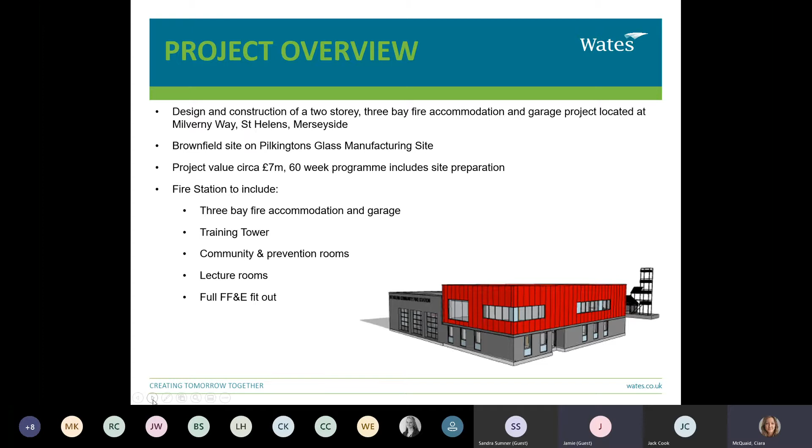Would you like to move on to the next slide, Garrett? So one of the benefits of the project is the improved response times that the fire station will have. The project is a merger of 2 stations - Eccleston and St Helens part is closing and moving into this one station, so this will become a super station in St Helens. It will save the fire service some money year by year on the budget, and it's going to be a fantastic new training facility for the fire brigade. One of the key benefits is there's only so much green space in the country for us to build on, so being a regeneration brownfield project, we're actually taking some of the industrial legacy from previous years and making a fantastic building. We'll touch on that as we go through.

So just to introduce Pete and myself, I'm a project manager for Wates. I've been with Wates for about 7 years. I graduated with a construction management degree, did some A-levels with maths, physics, chemistry. I used to love my sciences, and I really enjoy working outdoors, especially when the weather's been as good as we've had this summer.

Previously with Wates, I've won the Mentor of the Year award from Career Ready in 2018. That was for supporting students from Salford City College. I went down to London to pick up the award, and it was amazing hearing some of the stories of how we changed the lives of young people, and that's one of the key things that Wates do.

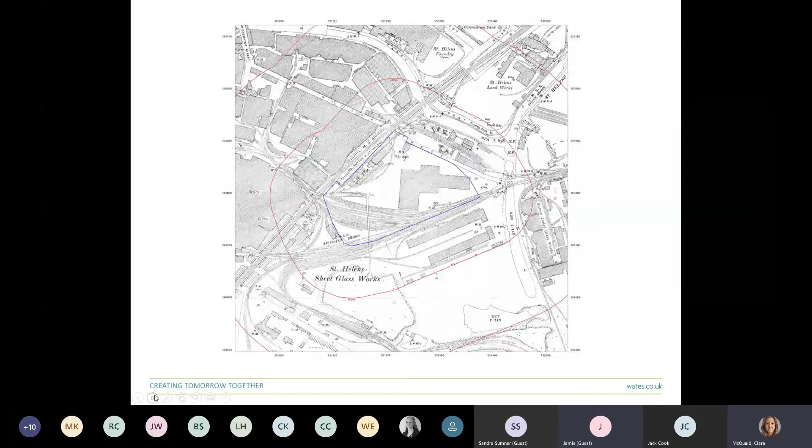When we were working through the project into the basement, and I'll show you some photos later, we were finding some old train lines, and I was wondering where they were all coming from. As you look at the slide, you can see that as the project's been developed over the years with Pilkington's and the other tenants and residents that have been here, they reused some of these train tracks in the actual build.

So as you move on to the 1920s, Pilkington's had bought the land, and in the centre of the screen you can see an L shape - that's a glass making furnace, where they're making things like TV screens and car windows. One of the factories on here at the moment makes about 90% of the UK's production of bathroom glass, and that's still in existence.

If you skip on to the next slide, please, Garrett.

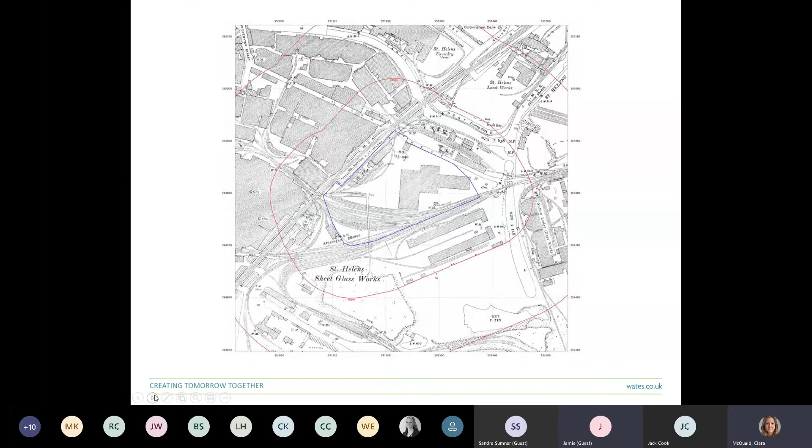The red markings outlining the top of the factory show where they made the glass, and the red line is our site boundary. Before we took over the project, the factory was demolished. Because it was adapted from about the 1920s up until the 1990s, I think they had experimental furnaces on the project. You can imagine that the technology for buildings with asbestos roofs and asbestos coatings onto steel was paramount. Also in the glass making industry, there's contamination as well that they use in the process - so a real mixed bag. I'll show you some demonstration of that as we go through the slides. You'd like to go on to the next slide, Ciara?

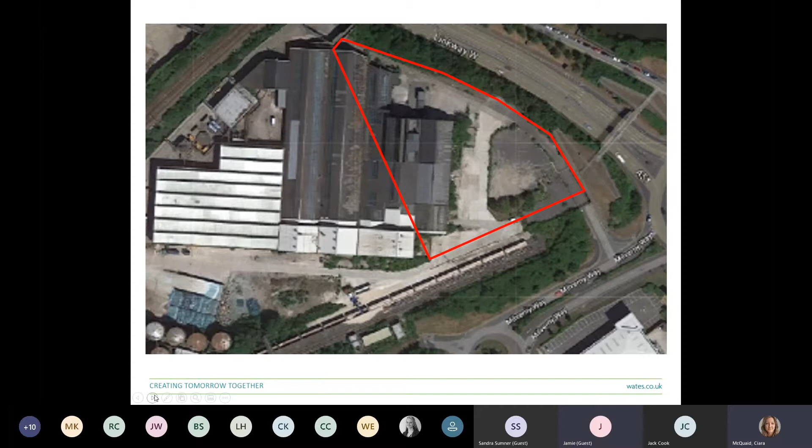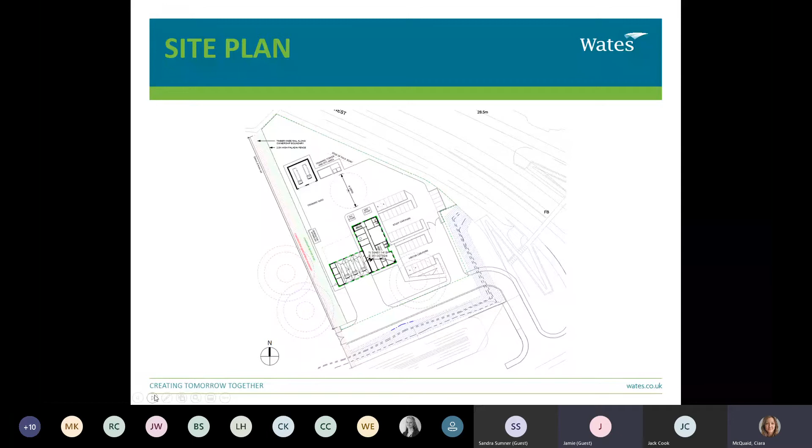So this is the site layout. You can see the main building with the appliance bay with the engine house attached to it, and at the top of the project you can see the garage where the CPL is going to be stored. A couple of things to note on the drawing: the blue hatched line that comes through - there's a couple of high pressure gas mains that run across the entrance to the site. You might also be wondering what the circles are - I'll come to the circles on a later slide. If you'd like to skip forward, Ciara.

Some of the top 5 key risks that we had on the project were the treatment to the existing ground and finding a suitable engineered foundation solution, given potential mine workings under the project and unknown voids based on the furnaces from the glass making process.

So we touched on the mine shafts - the circles on the drawing you saw were potential mine shaft locations reported by the Coal Authority. St. Helens has had years and years of coal workings on the site. Existing services too, like the high pressure gas mains that feed half of St. Helens - understanding a safe method of working around that and bringing in our drainage that crosses these pipes. Also, due to the industrial heritage, there's the existing ground environmental conditions, and how we make sure we don't contaminate St. Helens, our workforce, or anybody in the future occupying the building, coming up with a remediation strategy that satisfies the Contaminated Land Officer and the EA. And finally, ensuring we've got incoming services that will run the building for years to come.

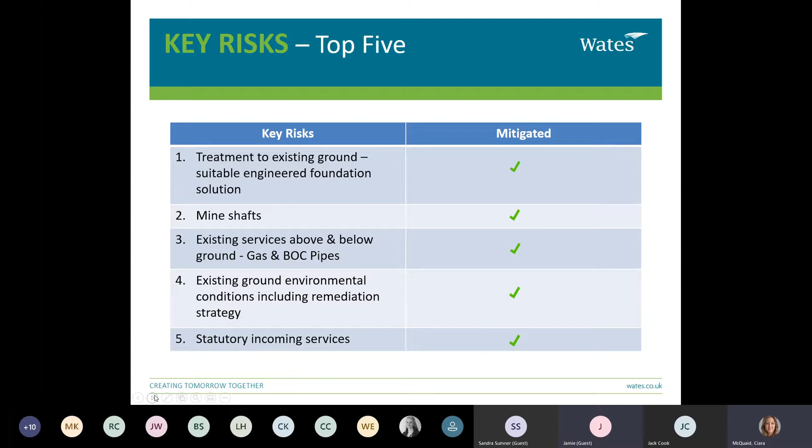So we'd like to skip on to the next slide, Ciara.

The next slide shows the potential targets that the Coal Authority had. Over the years, they've got documents recording where potential mine shafts are - these are coordinates. Before we actually built the building, we had to try and probe and find these mine shafts. Thankfully, we didn't locate any under or around the perimeter of the site, which was good for us in terms of not having to dig down and cap off the mine shafts. But it's quite an involved process, using a rotary drilling rig to put probes in the ground and try to find them. Potentially one of the shafts could have been about 450 meters deep, which gives you a flavour of what we were trying to find on the actual site boundary. If you'd like to skip on, Ciara.

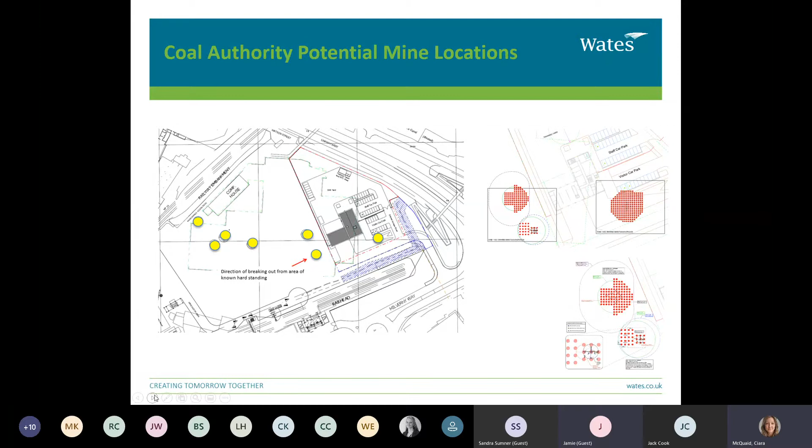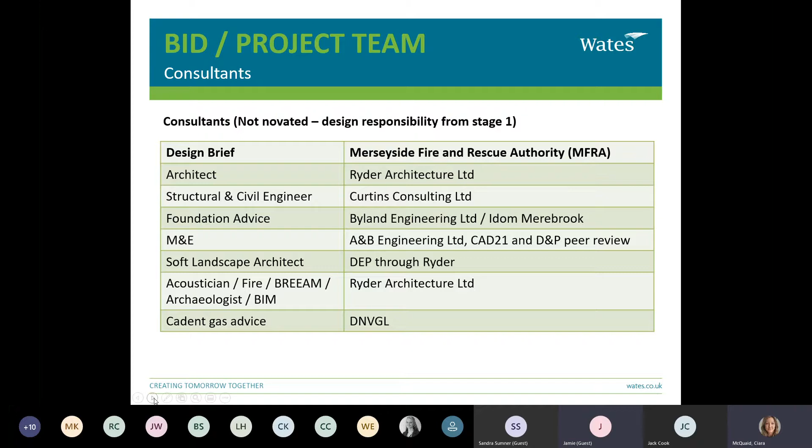M&E was carried out by A&B Engineering, based in Liverpool, which is part of our strategy for the Northwest Construction Hub to use and employ local contractors. The M&E was peer reviewed by Davis and Partners and also CAD 21. The Cadent gas crossing of the high pressure gas main was reviewed by Cadent and a company called DNVGL.

Byland Engineering, a ground engineering technical specialist, looked at the key risks and features of the project. We looked at whether the ground was suitable for piling, and whether it was suitable for mass fill concrete pad foundations, given we had unknown voids and obstacles potentially in the ground.

The best way of approaching the project was to excavate all the unknowns in the ground, all the voids, put the material to one side, crush it, and then create a 4 or 5 meter deep engineered fill foundation, on top of which we could place a raft slab foundation.

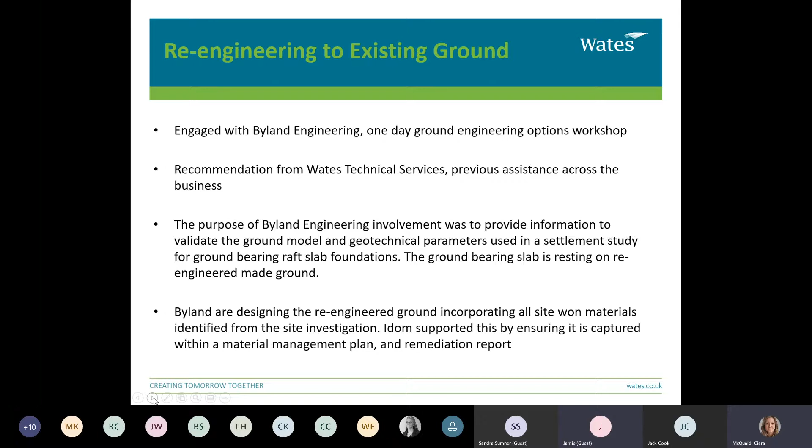We had to work out a safe methodology for machinery to drive around the site without collapsing into any of these voids. We used techniques like buried services survey scanning, GPR, to try to identify voids, core drilling the slabs, and drawing on knowledge from Pilkington's.

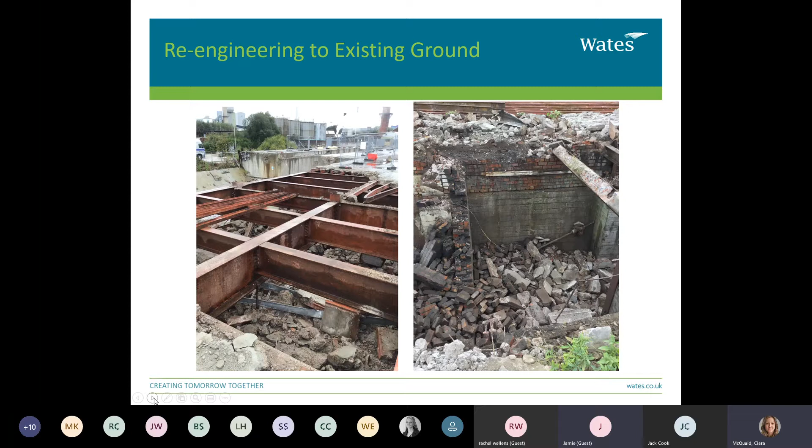You can see the amount of steel on the left, and the brickwork and existing structures in the ground on the right-hand side.

The next slide shows machinery breaking out all the concrete with various attachments - demolition hammers, grabs - each machine had specific jobs that had to be sequenced. You can see the big Moxy on the right, where crushed material was loaded up and driven to the storage area to be crushed.

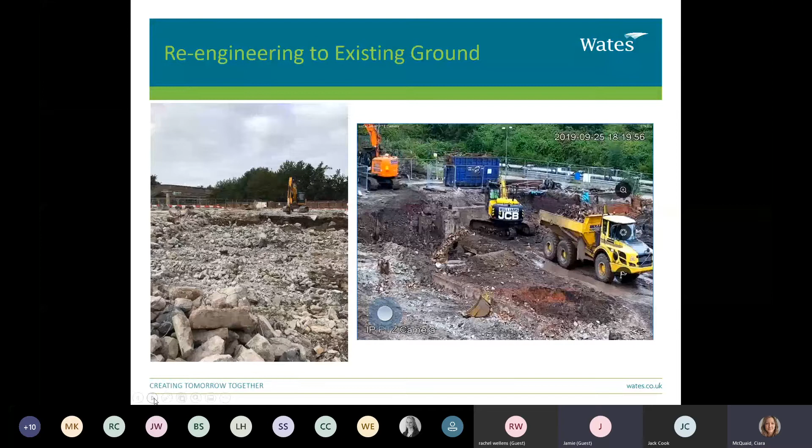The crushed concrete and crushed brick were all tested, and that material was then formed into the basement.

One interesting thing you can see is the black staining on the ground - that's actually flues. Anyone who's been to St. Helens knows they have chimneys, so hot gases from the furnace process went through the flues back up to the chimney. On the right, the yellow arrow points to a honeycomb structure, designed to extract more heat from the flue gases.

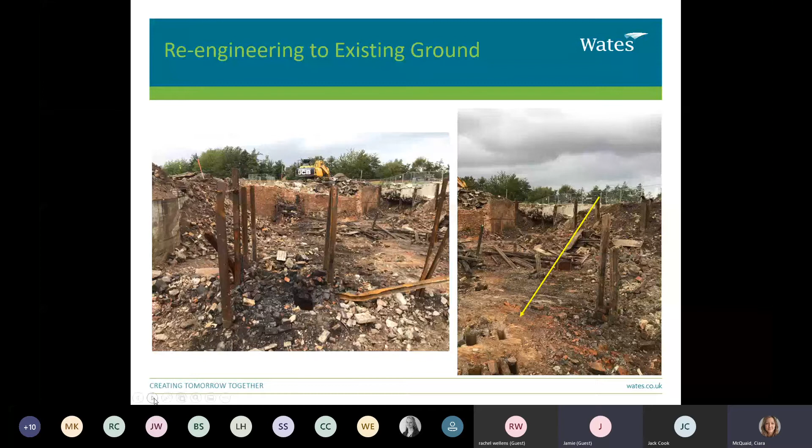The next slide shows a couple more of the flues, and the extent of the basement excavation - we were excavating all the material down to a competent layer.

Once we reached the competent layer, we carried out more testing. You can see the blue brickwork on the left, which someone had to form back in the 1920s or 1930s. When you look at buildings, you think about the people who actually built them - there was a brick making works on the site when Pilkington's was being developed.

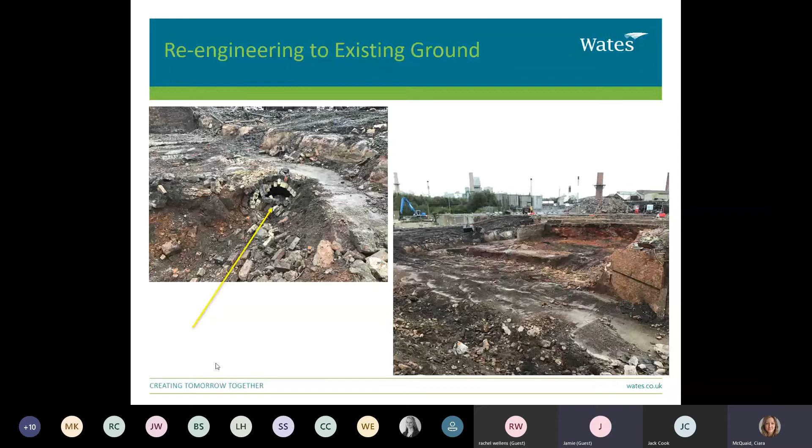You can see the testing going on when we got down to the lower level - dynamic probe super heavy testing, borehole testing, and geophone testing, which meant stopping all plant on site while waves were put through the ground. On the right, you can see us rolling in 200 millimeter layers of tested material.

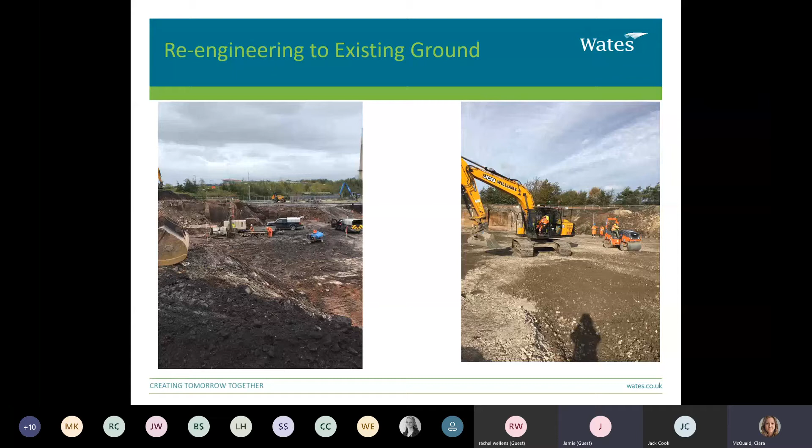So just as a figure for you, on site we've crushed about 14,000 meters cubed of material of various concrete and brick. There was about 200 tons of steel that came out of the basement voids. And that little gadget on the right-hand side is an NDM tester.

That piece of kit is worth about £16,000, and that has to be calibrated. It takes about 3 or 4 weeks to calibrate, based on various tests that we do that drive the spike in the ground, and that tells you whether you've achieved the right compaction and the right moisture content on the layer that you're working on. That all then goes into the validation report for the foundations of the building.

I'd like to go on to the next slide.

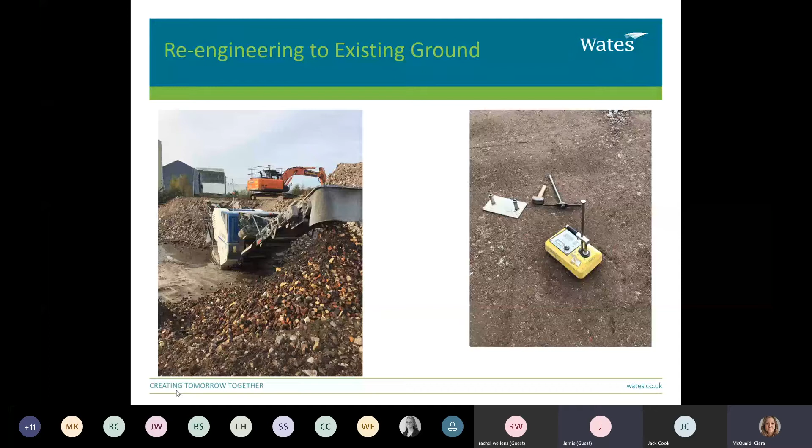So for those of you that are a bit more interested, there is a case study on the Northwest Construction Hub website. You can click on the website, and there's a document there that shows some of the other photos we've got, some of the flues where they were taking the gases to the chimneys.

So that photo on the left, it was fantastic. I think that was a cullet that came off one of the machines. In the glass making process, they used to put 10-15% of waste glass back into the glass. We were finding big lumps of glass boulders on site, loads of things from the heritage of making the project.

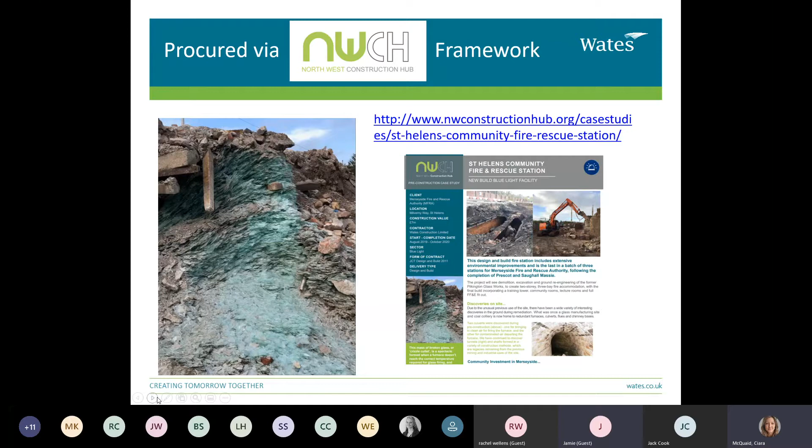And you can see all the old flues on the case study. If you'd like to skip on to the next one.

So for the next slide, one of the benefits of working in construction is we work in all weathers. We worked through the winter, and I think it's been one of the wettest Februaries on record, but the civil engineering team have managed to work in such a sequence that we didn't stop for work. We didn't have any downtime in February at all.

And you can see on the right-hand side that the way the site has been set up, there's space and availability for the machines to work. It's all about keeping people and the machines separated.

The little picture in the bottom there, that was the slab settling analysis that we got from Byland Engineering. So for those of you looking at different careers in the industry, it's not just about driving machines or bricklayers, which are important to us. There's also a lot of work that goes on from various consultants, designers, and engineers.

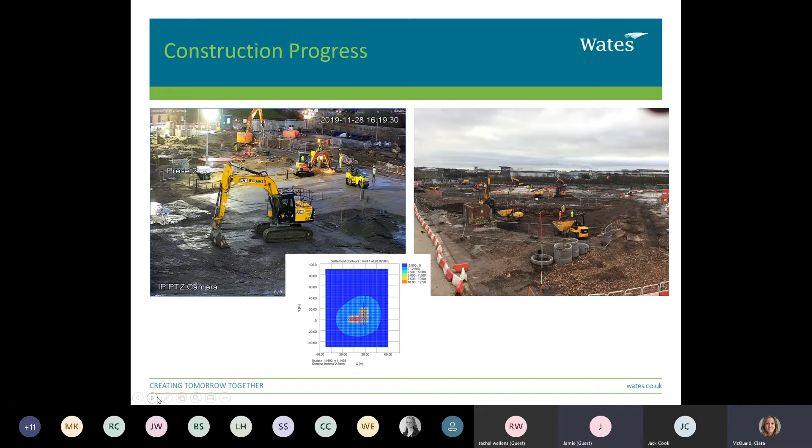So if you'd like to go to the next slide.

So you can see the second best building in St Helens in the distance. Obviously, ours is the best. St Helens are the champions at the moment for the Super League. But you can see the development in the area.

So on the right-hand side, where the retail part was an old colliery. Our building was based on a colliery, and then you can see the development, how things have changed. And there's future development in St Helens on the top right of the photo.

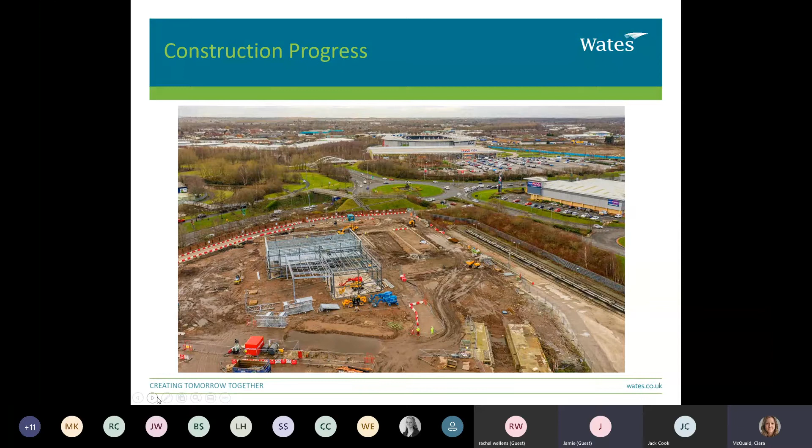Okay, if you'd like to go to the next slide.

I spoke briefly about the Cadent gas main, and again, you can read through the slides later on if these are saved onto the system. Within Cadent, if you skip to the next slide.

And on the right-hand side, we engaged with Cadent. We had the vacuum excavation unit, so anything working around services, just to make sure we don't damage the service with the bucket of a machine, using the Hoover attachment is a way of not damaging the pipeline.

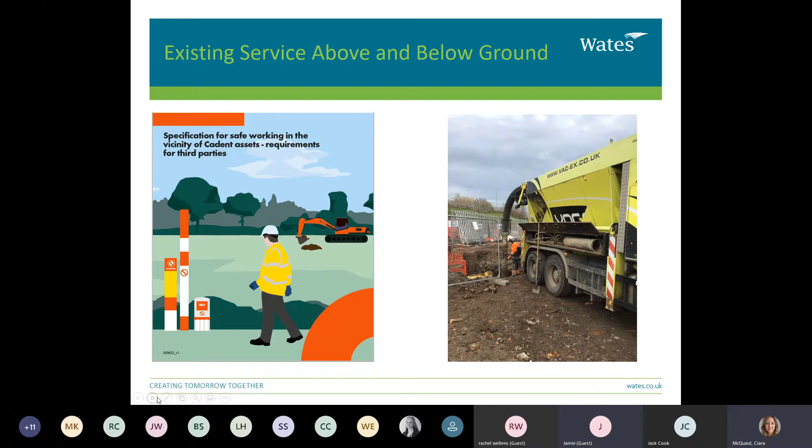So we'd like to go to the next slide.

Again, we touched on environmental control. Being a brownfield site, we had an asbestos management plan in place, with daily and full-time air monitoring. We had guys trained up on site in asbestos works, a full-time analyst checking anything discovered, and an asbestos contractor on site picking through materials to make sure we were capturing and monitoring any contamination possible within the site. All of that was supplemented by a material management plan and remediation strategy, and we had the St Helens Contaminated Land officers visit site to make sure everything we were doing was best practice and in accordance with national regulations.

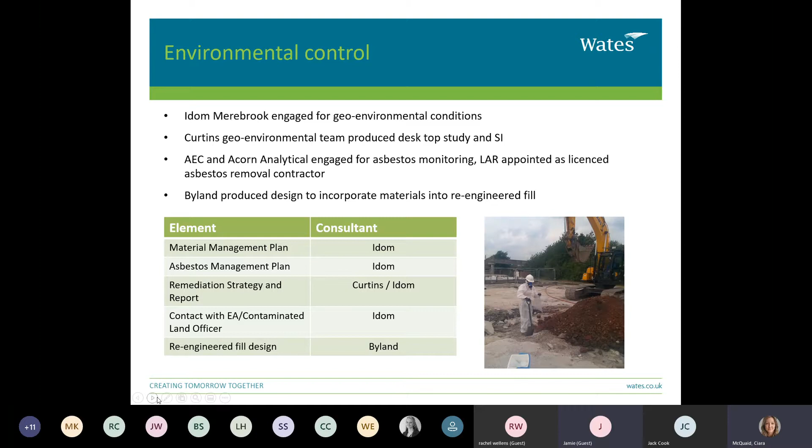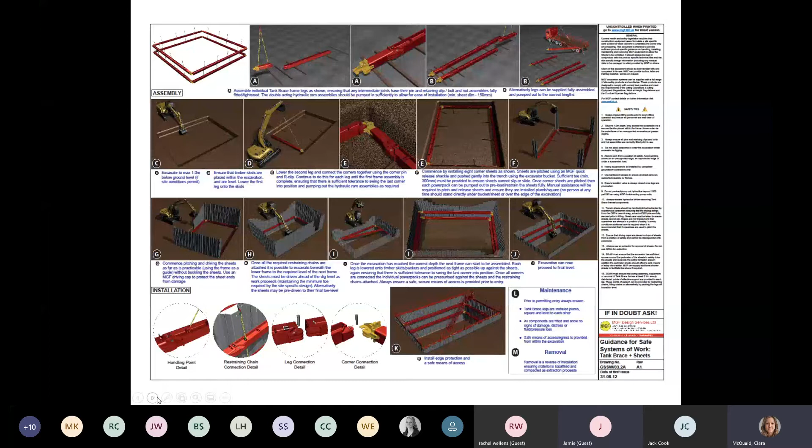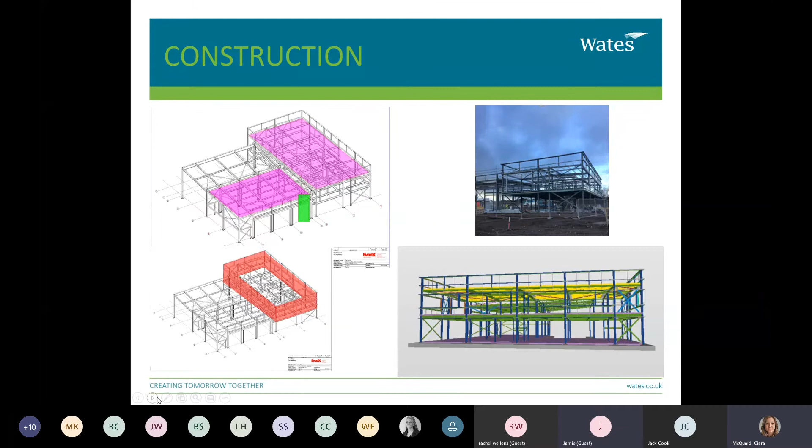Now we can look at the actual construction process. In the next photo you can see the plastic holding down bolts, where we've laid the concrete slab and the foundations of the building. For the holding down bolts, we're using plastic cones to protect the concrete going into the bolt. You can see where the steel frame goes and the reinforcement on the slab - it's about 750 mil thick reinforced slab on top of all the re-engineered fill in the ground.

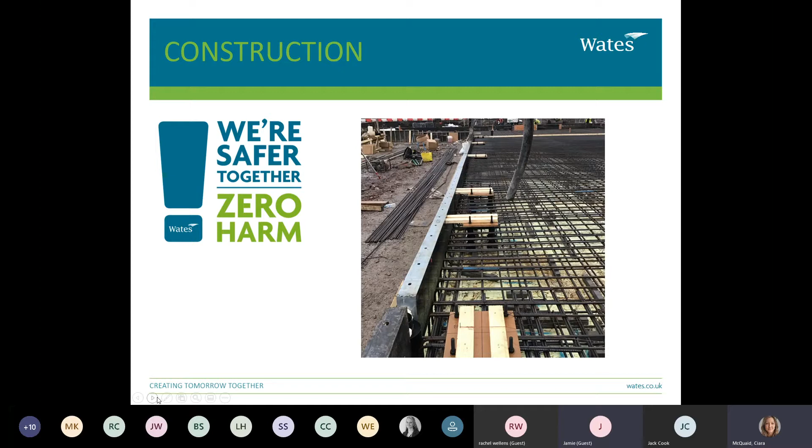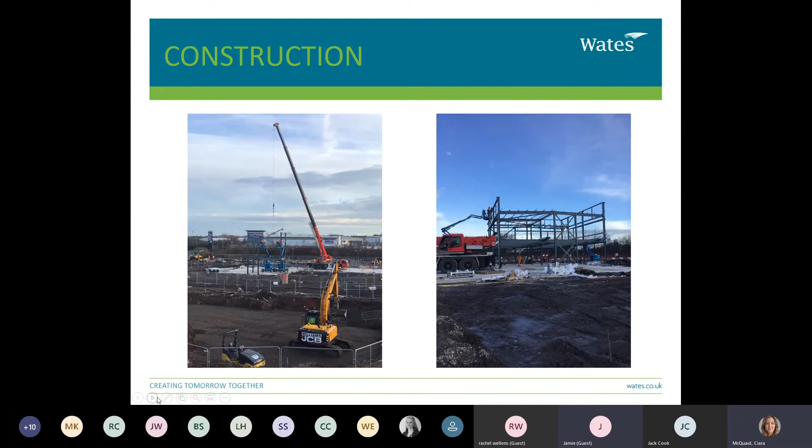If you move on to the next slide - a couple of photos just to show the process. We've got a 60-ton crane, shown on the left-hand side, which is what we erected the steel work with. You can see the steel frame going up, which is the basis for the structure of the building.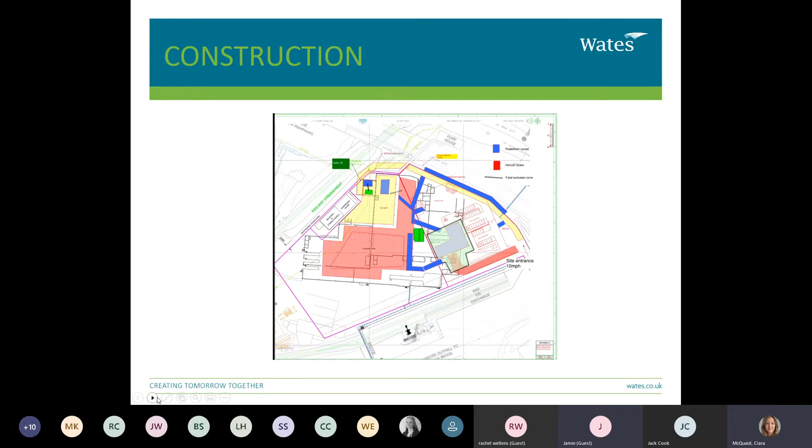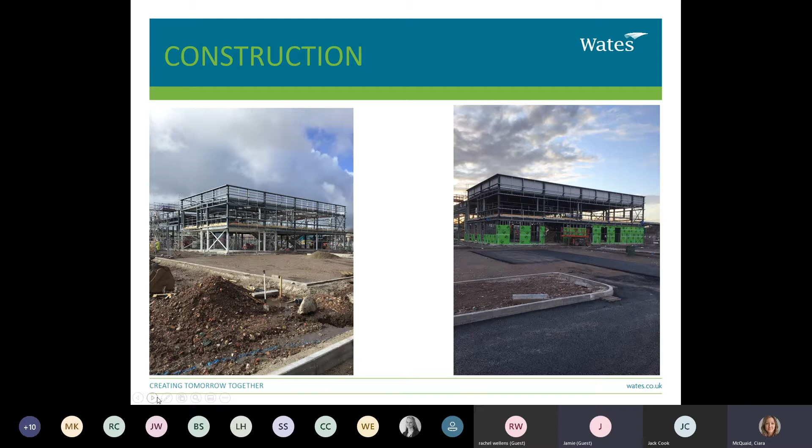Moving to the next slide, the next couple of photos show the envelope of the building. You can see the insulation on the right-hand side, and you've got your secondary steel support. We'll touch more on the facade in a couple of the slides coming up.

I think we'll skip over the video just now, but there is a video tour of site so you can have a look at the finishes. We talked about a couple of things inside and external. I think we're going to upload the PowerPoint anyway, so you can look at that yourself. I'm going to touch on a few more things rather than do it just now.

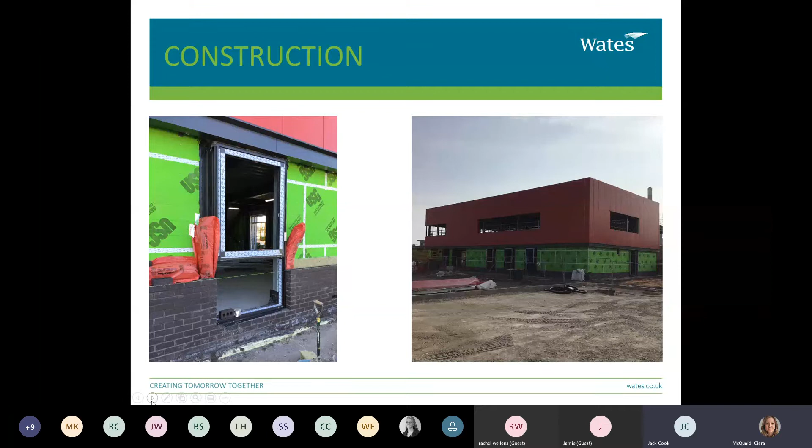Yeah Jack, we're just mindful of time. I know where we are, so we'll skip on to a few more photos. I'm just saying, obviously with time, Matt, do you want to just play the video and then we might move on - show something different? So if you just show the video for the last 5 minutes and then we can share the PowerPoint with everyone, if that's all right with you. Just to do with time. Yeah, sure, okay, yeah fine. You want to go back a slide and then you'll be able to show the video.

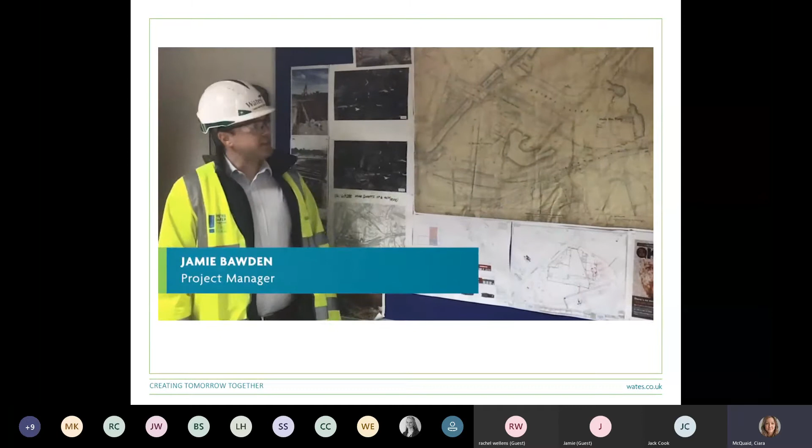I'm Jamie, the project manager for the St. Helens Fire Station project. Back in the 1880s, the site was built on a colliery.

It was an old coal mine, and then from 1920 onwards there was an industrial factory on site making glass. We took over the project when the factory was knocked down, and we've broken up all the concrete on site, crushed it up and used it in the foundations of the new building. This has reduced the number of vehicles on the road, meaning a more sustainable building and reduced diesel burnt and pollution. So it's a clever way of using the historical past to make a brighter future for all of us.

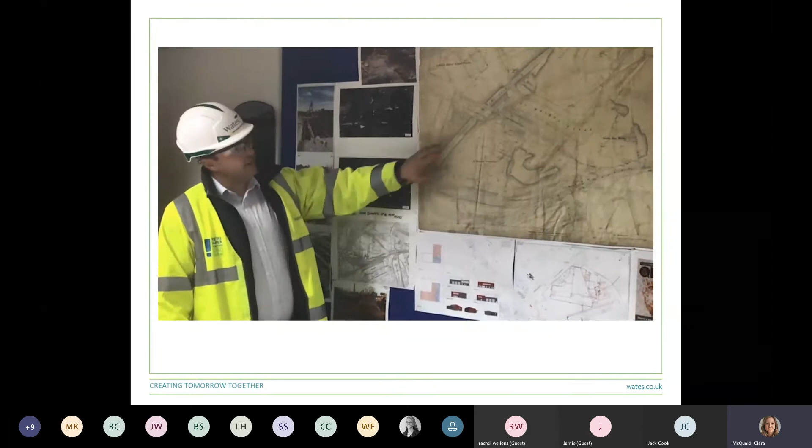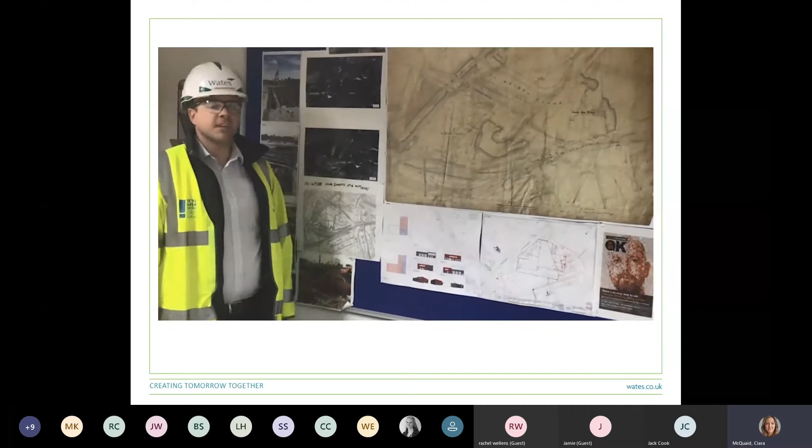The old map we got from F. Parkinson's, our nearest neighbour, clearly shows all the industrial heritage from St. Helens. You'll notice there's lots of chimneys poking out of the skyline. We've worked our way through all the ground, all the bases and footings of the chimneys, the flues and the glass that was in the ground, and delivered a fantastic new fire station for emergency fire and rescue.

Good morning, welcome to St. Helens Fire Station. How can I help you today? Have you been here before? Due to COVID-19, we have a procedure in place where once you're on site, we'd like you to wash your hands. If you give me a moment, I'll find out if you're supposed to be here, and I'll radio the team. Perfect, thank you very much.

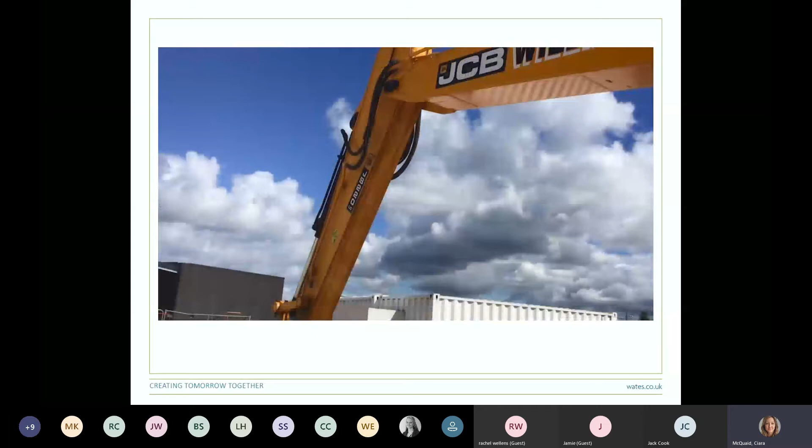This is a 20-ton JCB excavator, the biggest machine we've got on site at the moment. This was a brownfield site originally, and you've got huge excavations. The power the hydraulics on this thing produce is immense.

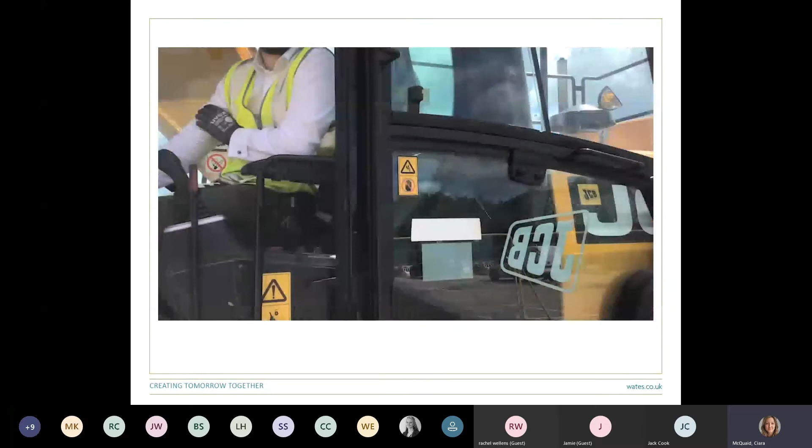The reason we focus a lot on building walkways is that when you've got machines like this travelling around the site, there's potential for some high-risk incidents, so you've got to be careful when you're moving around. One of the things we like in construction is that we can use big toys like this. We always like using bigger and bigger machines, going all the way up to the likes of this 20-ton excavator.

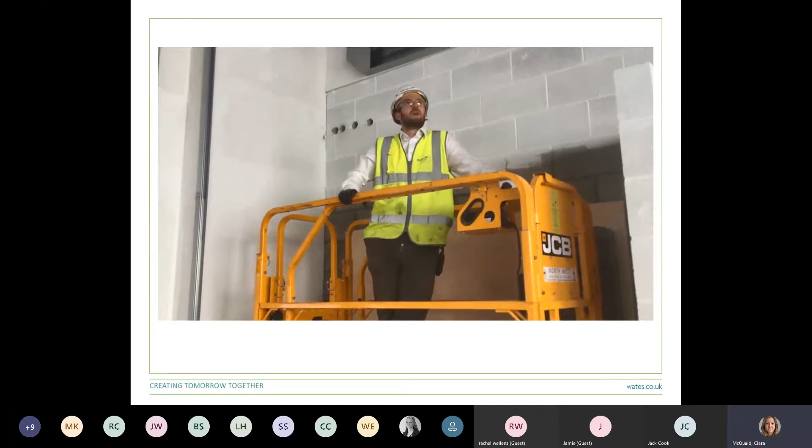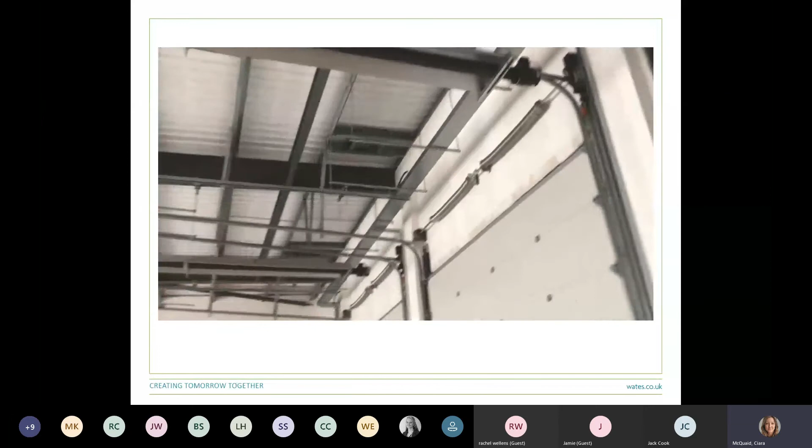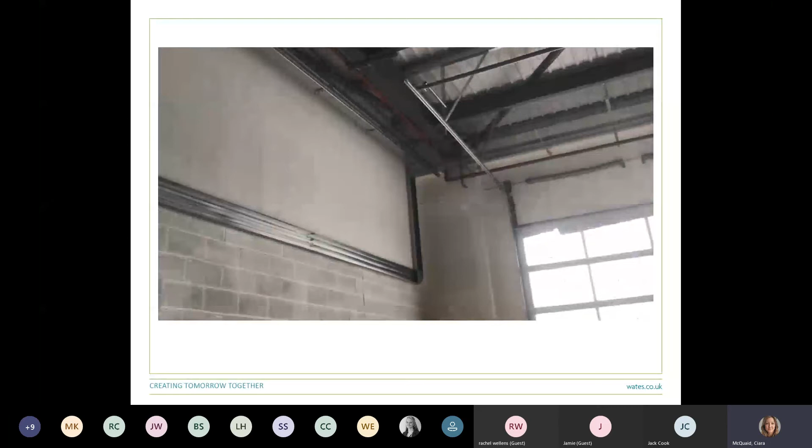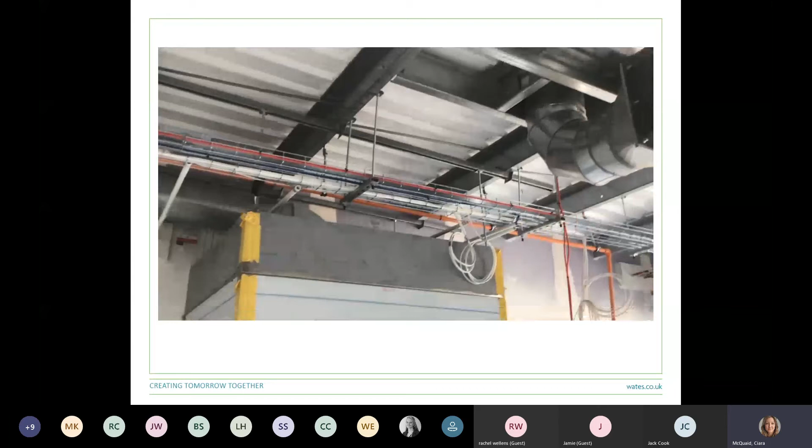So we're now standing where the kitchen is going to be fitted eventually. If we look up, you can see the importance of having secure fixings - it works both ways. Down from the roof, you can see the screws coming through, holding down the roof out and the insulation. And the other way, with the force of gravity potentially bringing things down, you've got secure fixings to the purlin, which is the light metal running across. The whole unit's fixed back, so it's nice and secure.

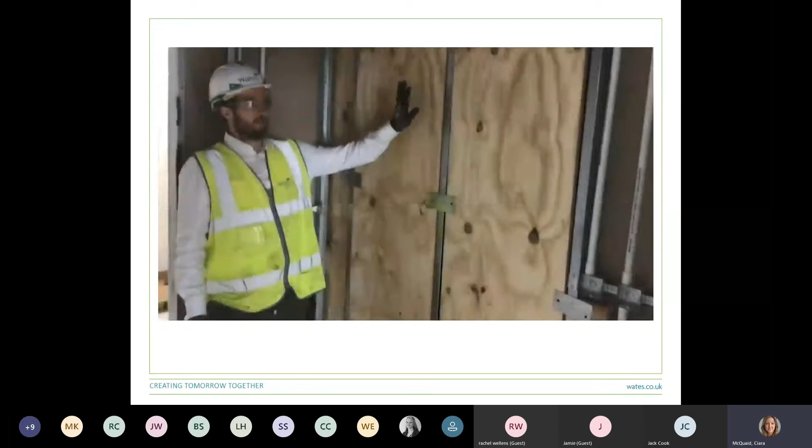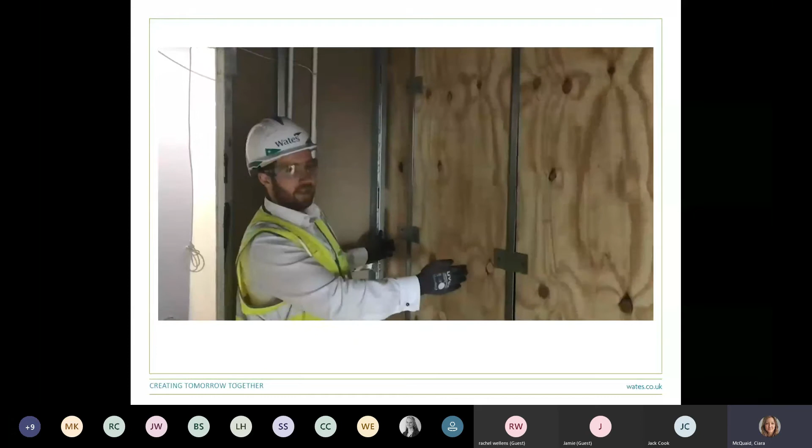One thing for me in construction that you don't always get to see when you go inside a finished building is what's behind walls and ceilings. If we look at all our internal walls, you can see you've got your plywood running down the wall, called a pattress. We use that to fix something back, so you've got a more secure fixing in case something's got some weight to it - so lights on this one, and we've got a sink unit going in here, which will be supported by the pattress behind.

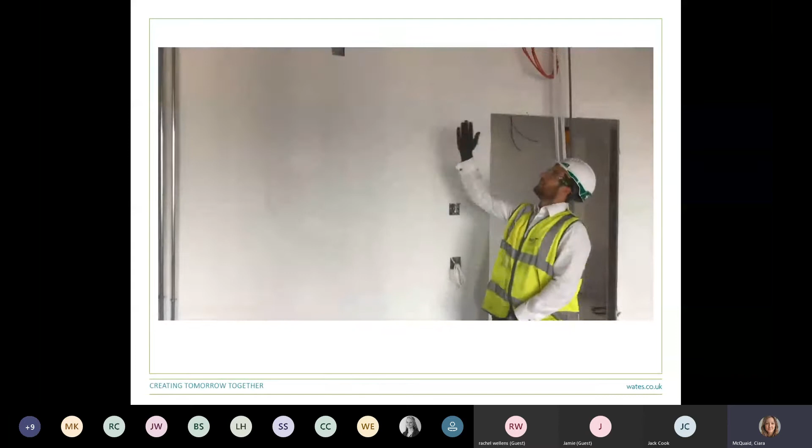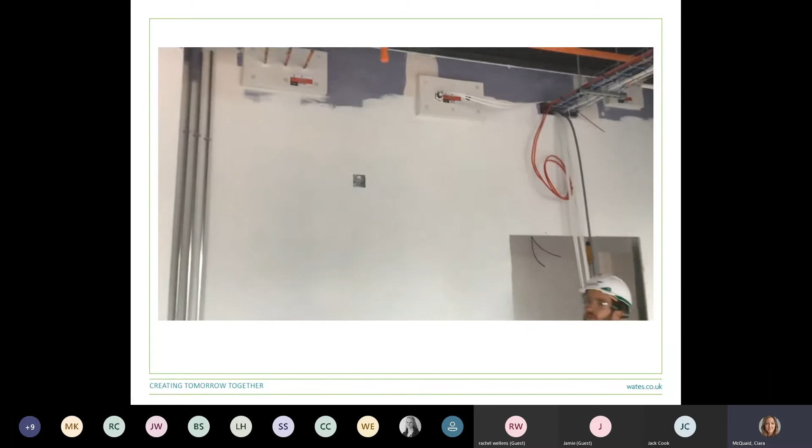You've got your conduit running down the wall, which will eventually turn into your sockets and data points. Your cables will be pulled down from the ceiling. So where you've got any services, you've got your copper pipe work, conduits and cables coming to the wall here. It's important that we maintain separation between rooms, so that takes the form of fire stopping. You can see the white batt that sits around it, designed with a fire rating. If there's a fire in certain areas, it'll have a designated time before it spreads into different parts of the building, typically 30 or 60 minutes. On here it's 60 minutes between the walls.

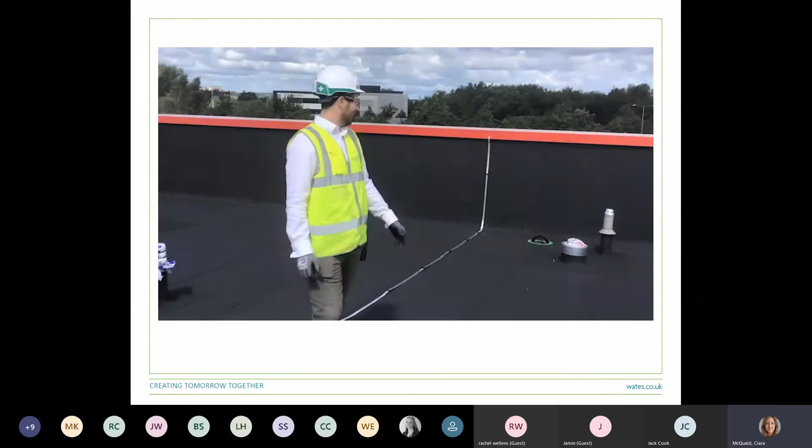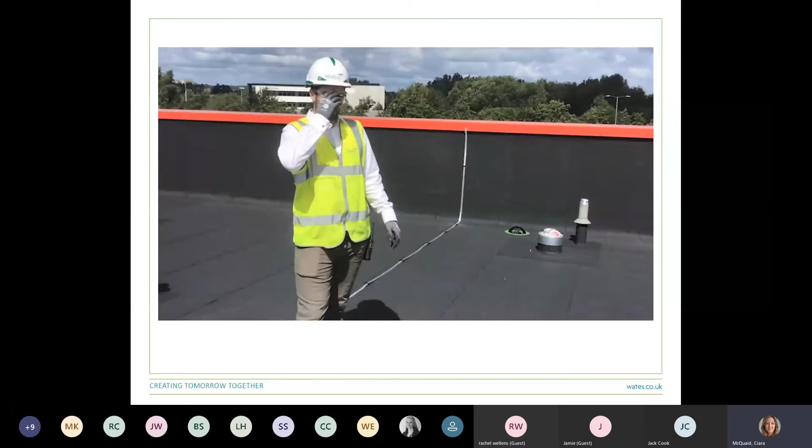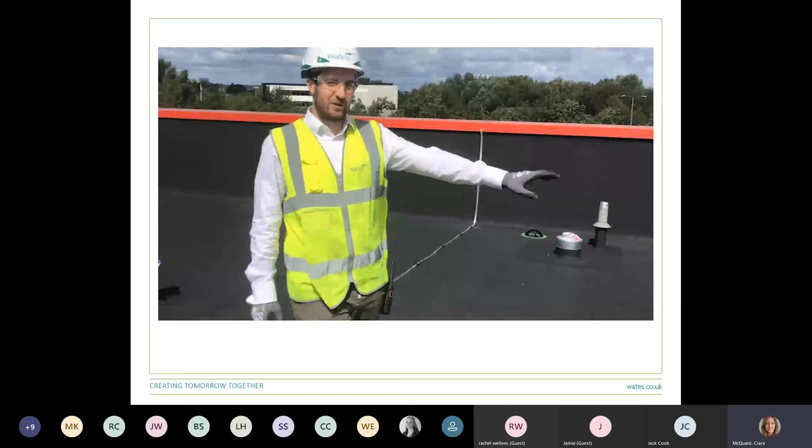Again, important things on the roof to keep it weather tight and stop any water getting into the building below. Then you've got your lightning protection - if the building does get hit by lightning, it's a connection straight down to the ground, which prevents any risk of injury inside the building.

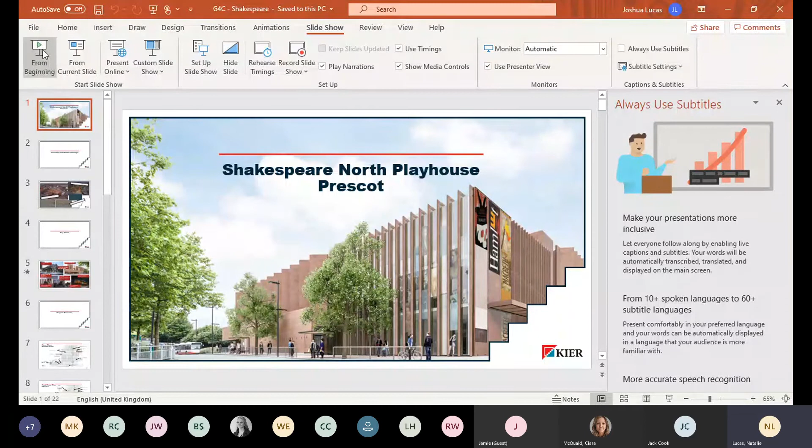So I'm Natalie Lucas, I'm from Kier, I'm an assistant design manager. I studied architectural technology at Liverpool John Moores University. I came out and went straight into architecture, working for a few architect practices. The last practice I worked for was Ryder Architecture, and we actually worked with Wates to put the Prescot Fire Station together, so it's quite interesting to see the previous presentation and the similar characteristics.

One of the things I enjoyed about my career as an architectural technologist was the close relationship I had with contractors. We tend to do a lot of the handover and detailing, so you spend a lot of time on site, and it just clicked in my head that I wanted to pursue a career more in the construction side of things as opposed to architecture. Also, having an appreciation for architecture, I thought it'd benefit me moving into contracting with that kind of appreciation. So I joined Kier exactly 2 years today, and I've never looked back since. I've really enjoyed my career so far as a design manager. It has its ups and downs, but most of them are ups, and I think it's just the fact that I finally found my calling anyway.

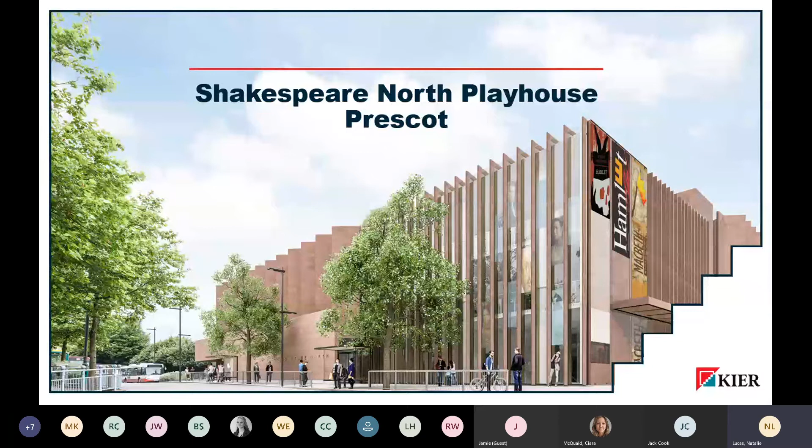So, location and a bit of media coverage for you. Some of you may have already seen a lot of the press coverage for Shakespeare. It's been on BBC One. They've been on site a couple of times, and Dame Judi Dench is actually a patron of the Shakespeare North. What I've provided on screen here is just a couple of snippets of things we found in the media, some interesting points.

Shakespeare Prescot is going to complete what they call the Shakespearean triangle, because we have the Globe, the Sam Wanamaker in London, we've got Stratford-upon-Avon, and now we've got Prescot. As Dame Judi Dench has said, everyone in Britain should be able to follow a Shakespeare journey from London to Stratford and then to Knowsley.

In my experience, this is the first Playhouse theatre I've ever done. I did work on LIPA, the theatre school in Liverpool, but nothing really compares to this. It's a high profile project that's had exposure on a regional and national level.

The scheme is linked to the wider regeneration of Prescot. A number of new restaurants and bars have opened in the area over the past 12 months on the back of the theatre going ahead, and I think confirmation of the scheme progressing was the catalyst for even more businesses opening in the area.

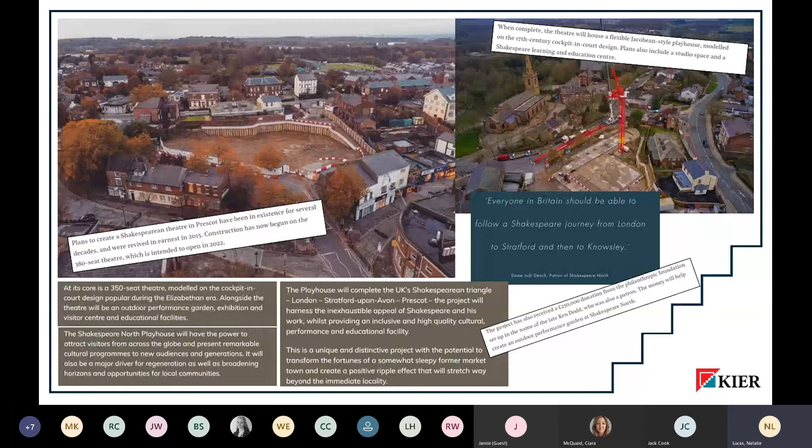It's just obviously such a downfall to COVID. All these new small independent businesses opened around January, just when we started the main works, and unfortunately some of them have had to fold. So I'm hoping that once Shakespeare is up and running, these businesses will resume.

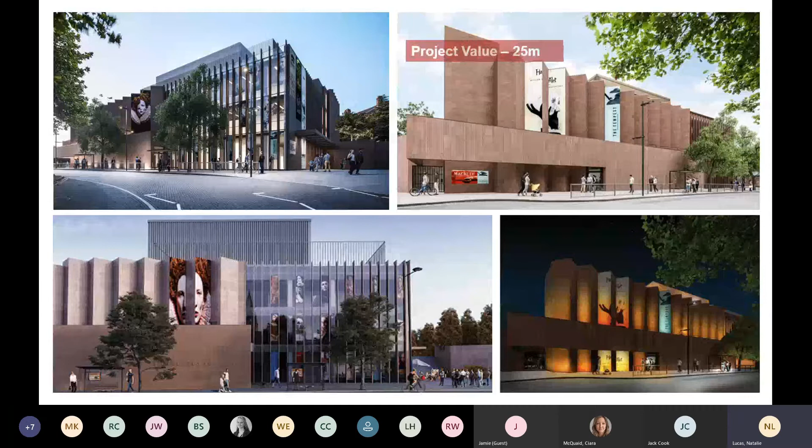There's some key facts, so here's a couple of CGIs. The project value is 25 million, client is Knowsley Council, 106-week construction period, handover hopefully, fingers crossed, January 2022. I say hopefully because we all know, being in the industry, that obstacles can come our way, things can get delayed. So far, so good.

An interesting fact about Shakespeare is the concept architect is Nick Helm Architecture. They're based in London. This scheme has actually been in his portfolio for about 20 years now, I believe, and it's only now actually coming to the surface. He's still very much heavily involved in the scheme, in particular the externals.

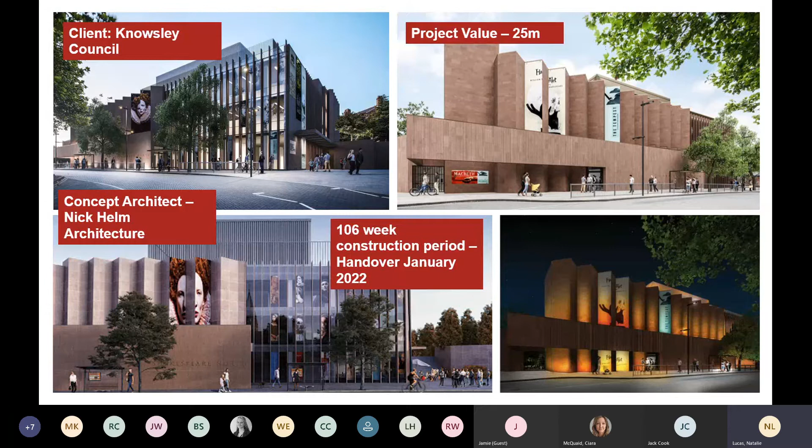We've had a couple of VE changes. Initially, at the top right-hand corner, you can see we've got a bit of sandstone cladding, and that's actually now a red-pink brick. Still looks the part - that was approved for planning, thankfully.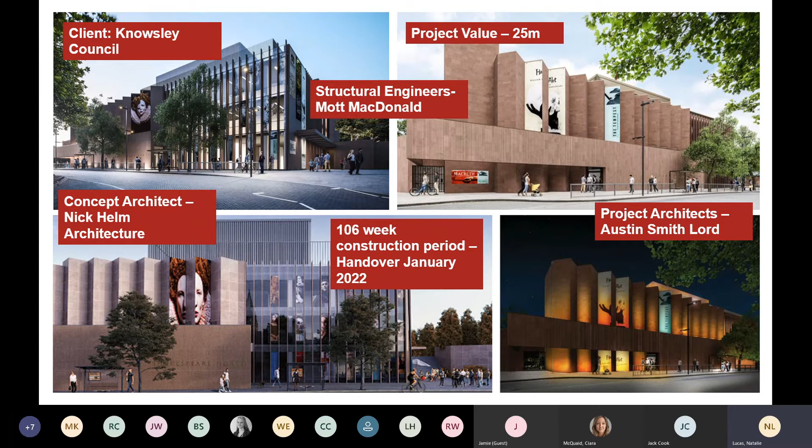The actual project architects overseeing the whole scheme are Austin-Smith:Lord. They've got quite an impressive portfolio. One of my favourite buildings is in Liverpool - the FACT cinema, like a theatre gallery. They also did the refurb of Liverpool's Central Library, which is pretty impressive. If you happen to be a bit bored, go onto Google and have a look - it's pretty amazing when you go inside.

Structural engineers are Mott MacDonald, MEP engineers are Dodd Group, and lastly the stage engineering is by Arup and Adlib.

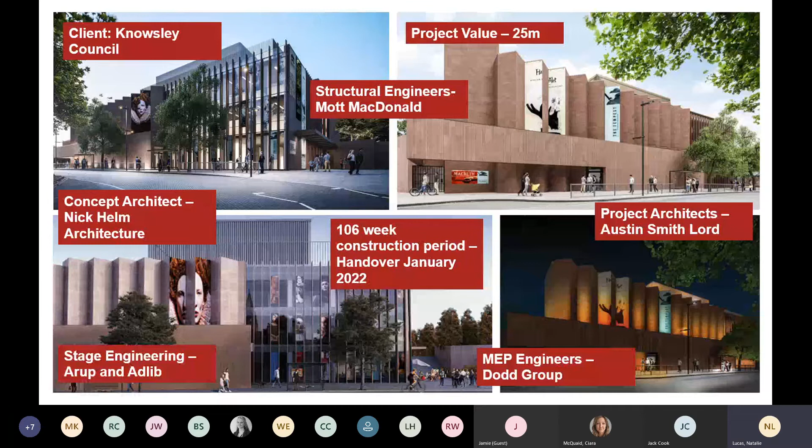So the centerpiece - what I'll do is try my best to talk you through the floor plans, but I'll just scoot straight to the first floor. We'll talk about the theatre because that is the most interesting centerpiece of the scheme. It's actually a recreation of a Jacobean theatre, very similar to the Sam Wanamaker.

In fact, it's an oak framed structure sited within a reinforced concrete box. A specialist subcontractor, McCurdy & Co, has been employed by Knowsley Council to design this frame and fabricate the oak, which is an 18-month process. Kier will then employ McCurdy to deliver the frame on site - the same subcontractor who did the frame in the Sam Wanamaker Playhouse in London, part of the Globe Theatre. It's the only subcontractor in the country with the experience and expertise to deliver these works.

His name is Peter McCurdy. He's an interesting guy - he travels over to Brazil, he travels all over the world to find the best oak.

I wish I could physically point, but where it says stage on the screen, you can make out the concrete octagon shape - that's the actual theatre itself. The little bits in the corners are the circulation points and sound lock zones.

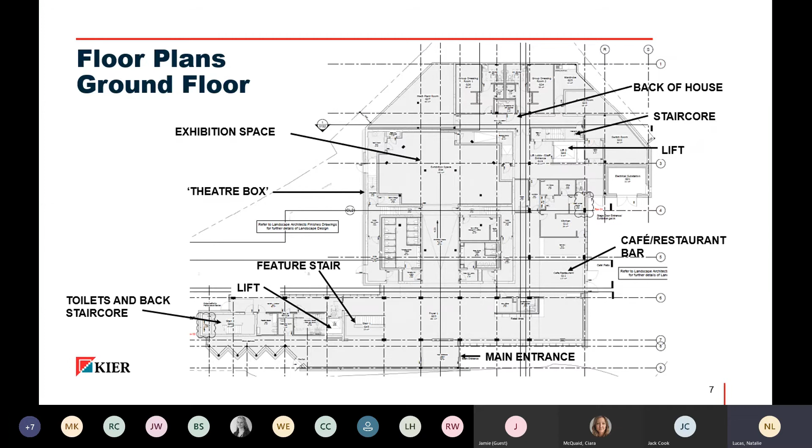If you head towards the back of the site, you can make out a ramp that takes you into the exhibition space. At the back of house here will be the green room, dressing rooms, plant areas, and there's a bar cafe area as well, just on the right hand side of the foyer.

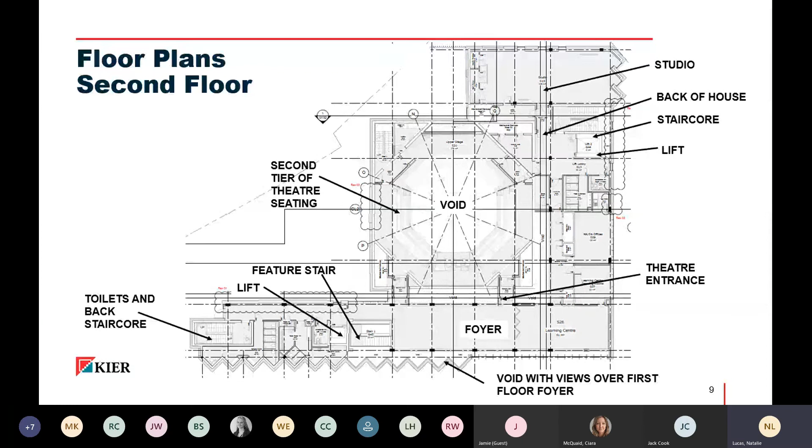Those of you who have seen Sam Wanamaker will be able to recognise the same characteristics. Now one of the complications of having this frame is that it's a new building.

We all love M&E, we all need M&E. With it being a traditional frame, back in that period of time you didn't have M&E, so we're having to combine both traditional methods and brand new methods of design and coordination. We're weaving in the M&E where we can, but making sure it's hidden, because we don't want to see big ducts through the ceiling or through the stage area - everything has to be as traditional as possible.

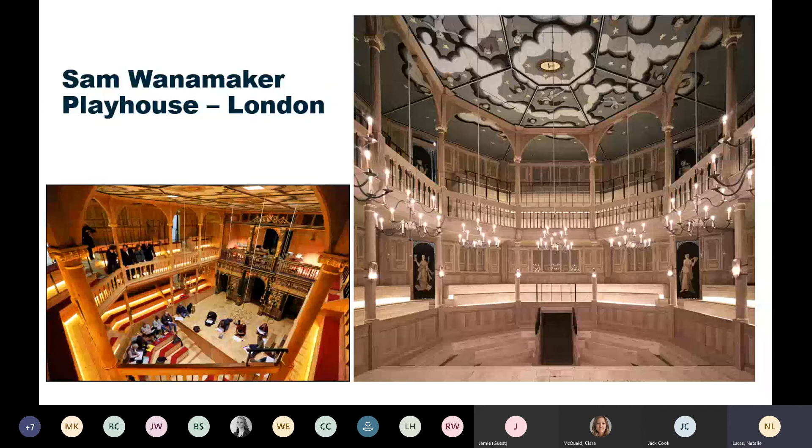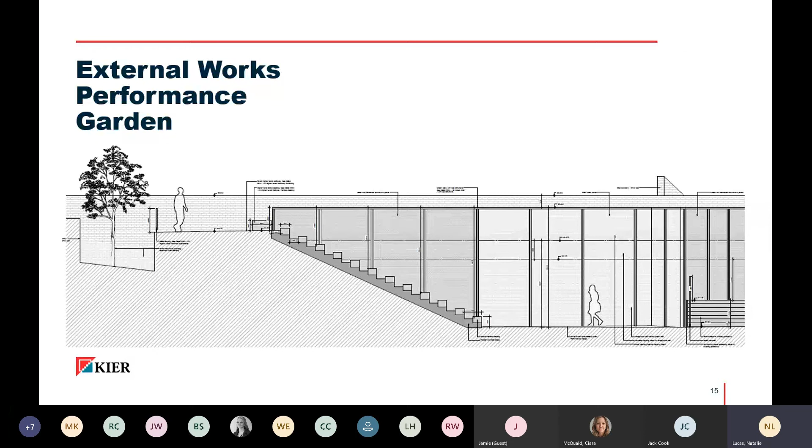Internally there's a combination of exposed concrete with stringent acoustic requirements, and there's also an external performance space funded by Ken Dodd's widow, Lady Dodd. This is actually an open air theatre, which is lovely.

It actually looks like a bit of a piano from this view, but we've got LED lighting in between the stair treads. This is to the rear of the site - it's very small, and if you visit site it's a really small piece, but a very significant part of the project.

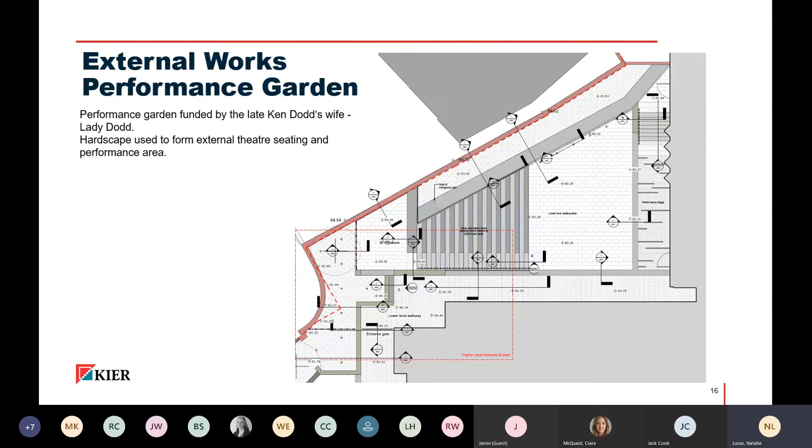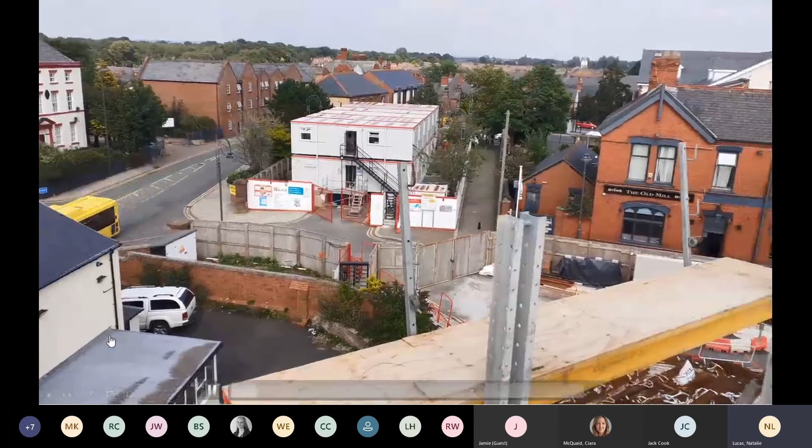So this is a video from site, I hope this works. You might be able to see here, this is the octagon shape.

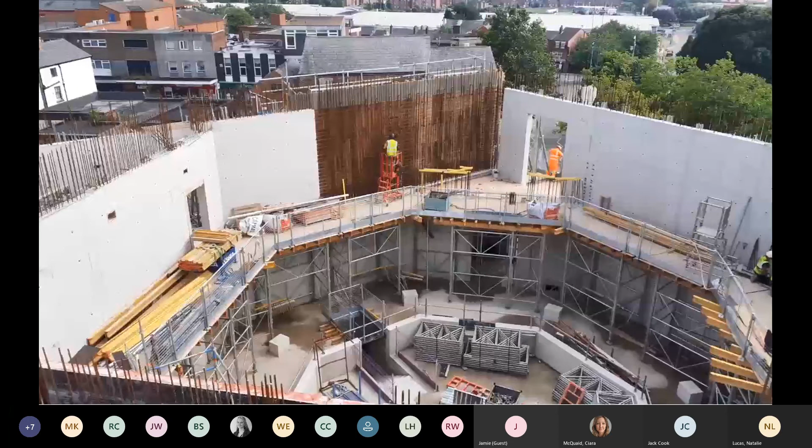Here is you actually come up - let me keep that on pause. You come up these stairs from the ground floor. So you come up from this level, these are the pit passage stairs, and this is actually going to be a stage area, but we've also got temporary seating in here as well, which can be removed.

And there will be seating - I'm showing you with my hands, but you can't see. I'll try with the cursor. We've got seating around here, designed by Auditoria Services, again with M&E weaved in and around the chairs so you can't see anything. Thankfully nothing is exposed.

Just a quick view showing you exactly where the video is taken - you come up where I've highlighted here. I think this is for the next video actually. The video will show you walking up these stairs and coming up into the stage area.

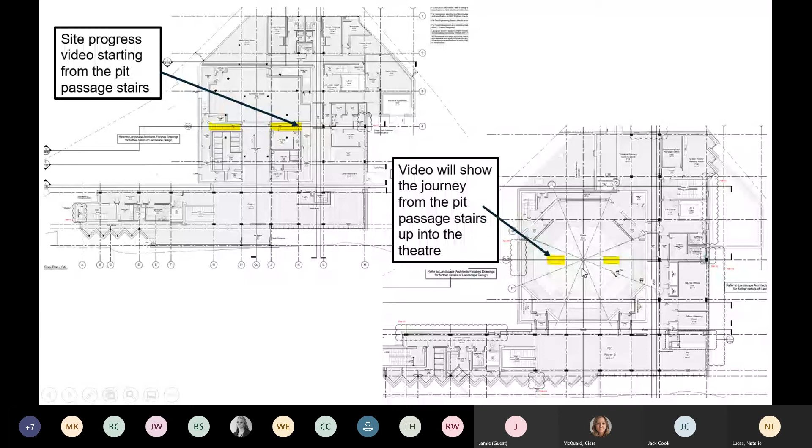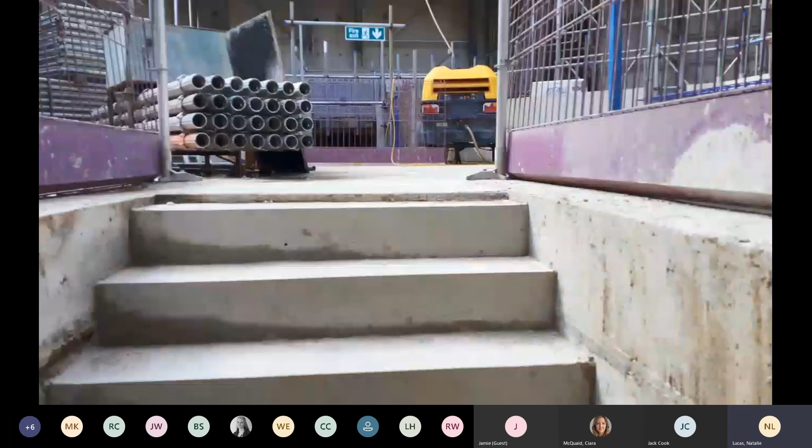So this is where the performers will actually walk through. And there's one on the opposite side, so you will both come up at the same time, depending on what the performance is.

And this can also be used for the audience as well, depending on how we want to rearrange the scenery and the stage itself. As you can see here, we've got the exposed concrete, that is staying exactly how it is.

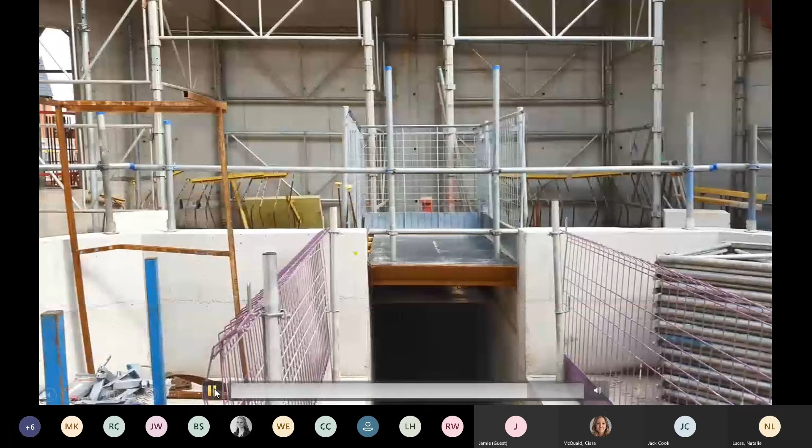Okay, so I'll just quickly talk very briefly about the procurement route. One of the challenges of the construct-only procurement route is that the design team are working directly for the employer under a traditional arrangement, meaning our influence over them is limited.

Being so used to working on a design and build scheme personally in my career since being in the industry, it's been an interesting experience as a design manager on the scheme. I am very fortunate that in my short time with Kier I've been exposed to both a D&B and a traditional route, and I think both come with advantages and disadvantages.

I think the advantage to this is that, as I've said before, we've got such a high-end scheme that we get to play around with really amazing finishes, and overall it's just going to be a huge legacy to leave behind.

So that's it really from me. We've completed, we're on with it - we've pretty much finished the concrete frame. As the videos that were part of the site progress show, this is where we are at the moment, just to give you that kind of overview of our stage.